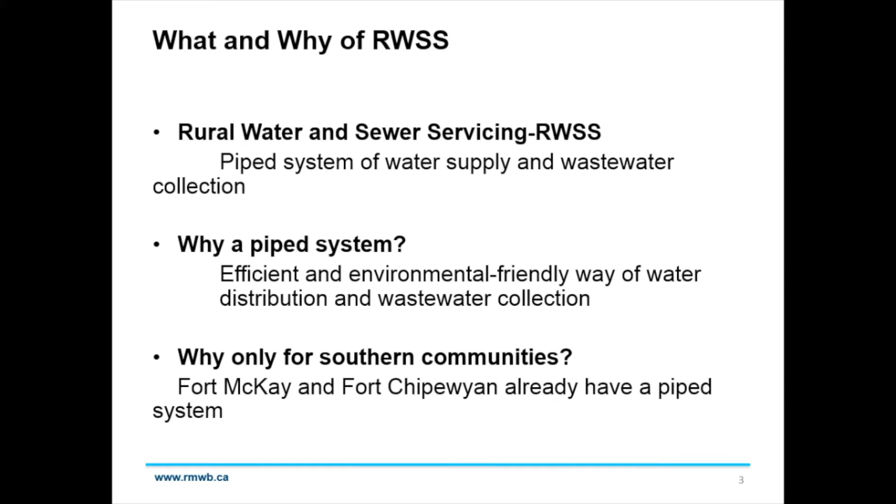Why only for southern communities? Because our northern communities, like Fort McKay and Fort Chipewyan, already have a pipe system.

The current water servicing to Saprae Creek looks like this, in which water comes in through the municipal pipe, where I'm moving my cursor right now, and it goes to your building.

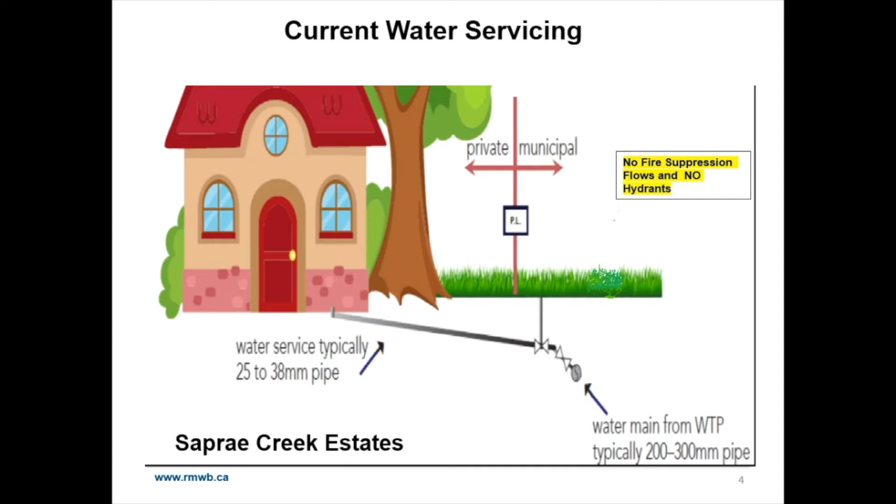The current sewer system looks like this. The wastewater from the building comes into a septic tank, goes into the pumping chamber, then goes to the mound or septic field. Some houses have a septic field.

There are a few houses which have a holding tank, where they need a wastewater truck to come every week, every second week, or twice a week, depending on use, to collect their sewage and dispose of it.

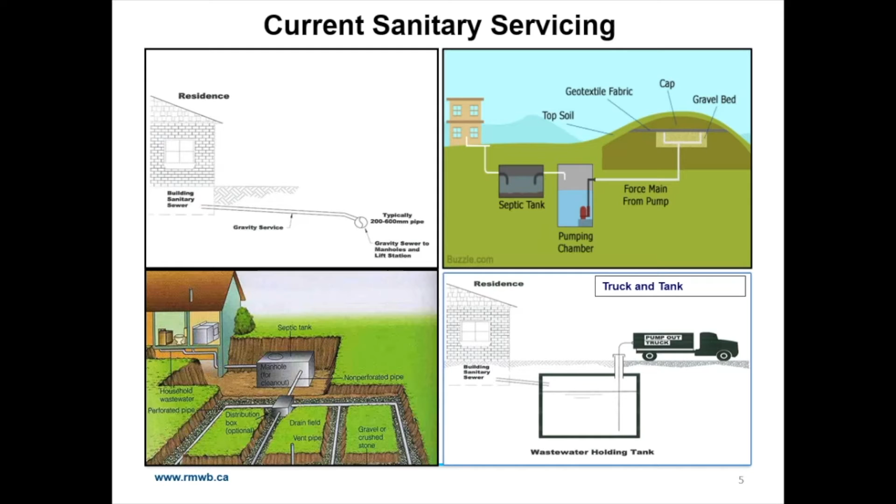Considering this existing system, the Council of the RMWB, in its meeting of July 9, 2014, approved a low pressure sanitary system and an upgraded full pressure water system for Saprae Creek.

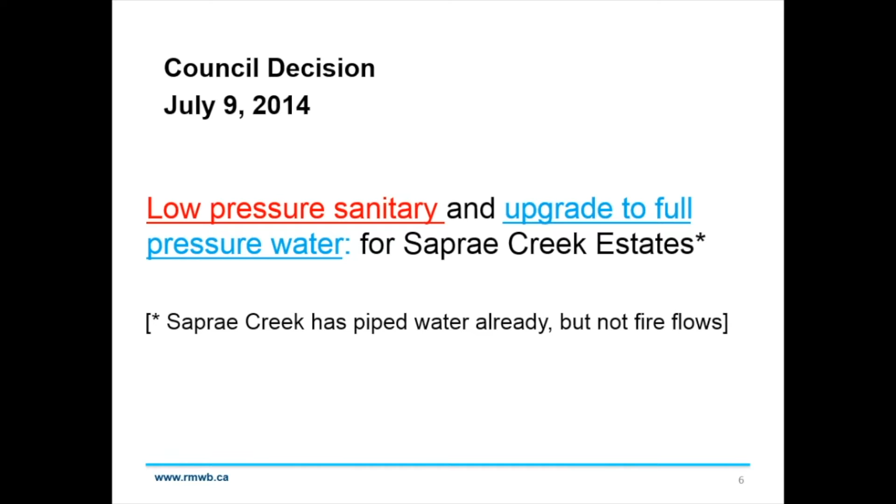The new system looks like this. This is the water system that we have just provided. If you can see, it has a hydrant, meaning the flow within the pipe system now caters for firefighting. There is enough flow to fight fires, and the hydrants are there.

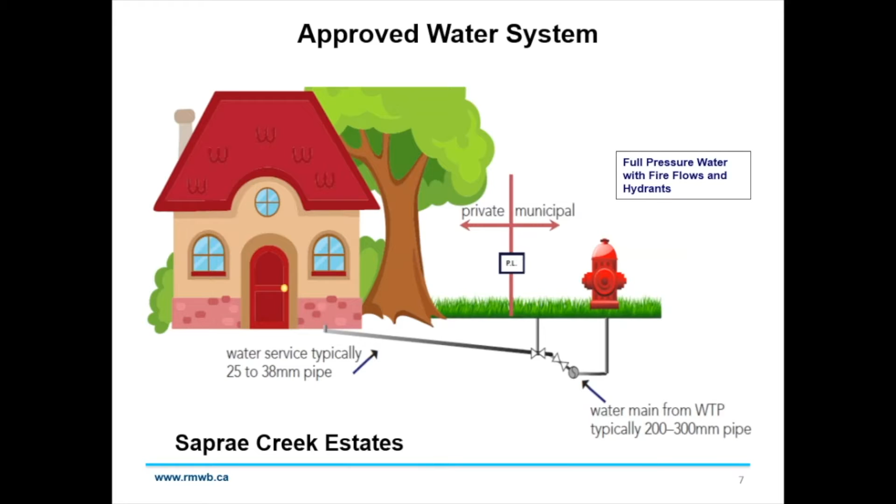The sanitary system looks like this, in which the septic tank will be connected to the municipal pipe. It will no longer be discharging onto your septic field or septic mound, and you won't need the sucker truck coming to your lot every week to suck the gray water.

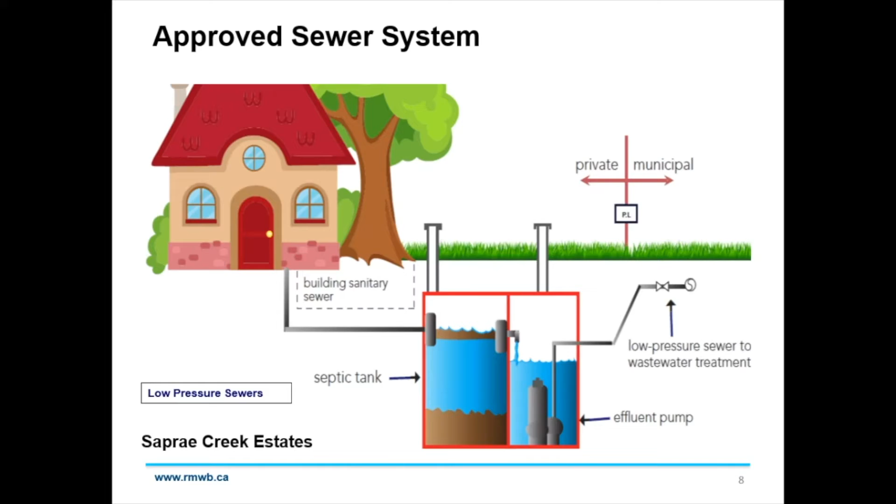The system required is efficient when the houses are below the road, where a normal system cannot work efficiently. In those cases, this system is the better choice to make sure the house is serviced.

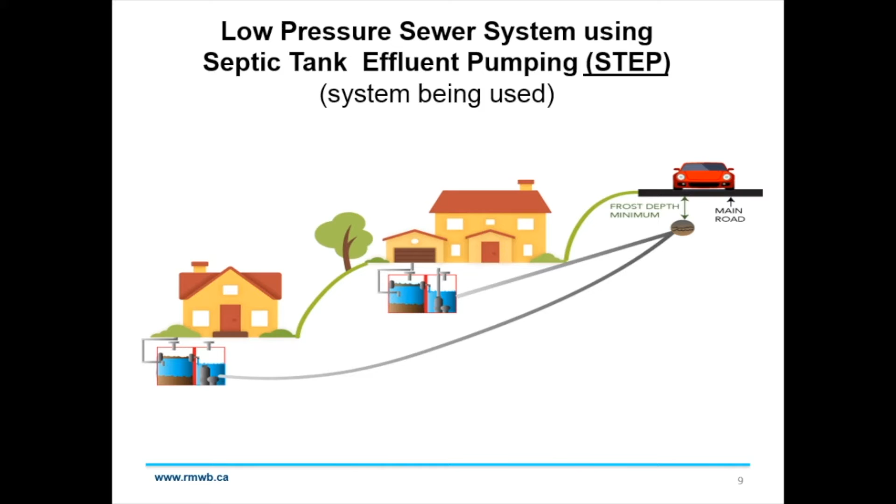Benefits of the pipe system: predominantly, it's a protection of underground water and the surrounding environment. The pipe system is affordable, dependable, and sustainable. It is used in other municipalities, for example Lac La Biche County as well as Strathcona are two examples from Alberta using this system, besides others in the United States.

This system will eliminate or reduce truck traffic on the road, which will enhance dust control and allow us more control over dust, enhancing the life of our roads. We believe this system will also increase the value of the property.

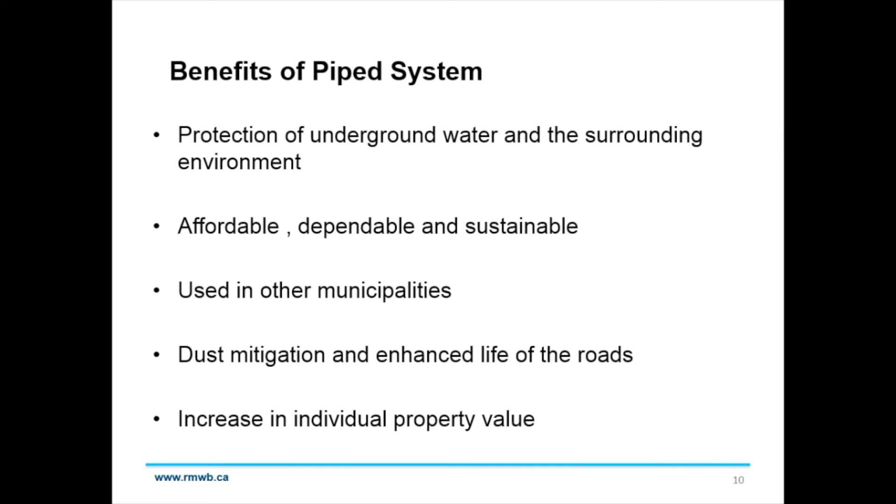In order to reach this stage, which is the service connection stage, we needed to do a few projects before we start asking homeowners to apply for service connection. We needed to construct the road, construct the water and sewer main line within the road, and construct the lift station.

I'm moving my cursor here. This is the lift station we have constructed, the fire hall. We also needed to construct a force main which conveys or transports the wastewater from Saprae Creek to the airport wastewater system, and that is connected to the wastewater system in Fort McMurray.

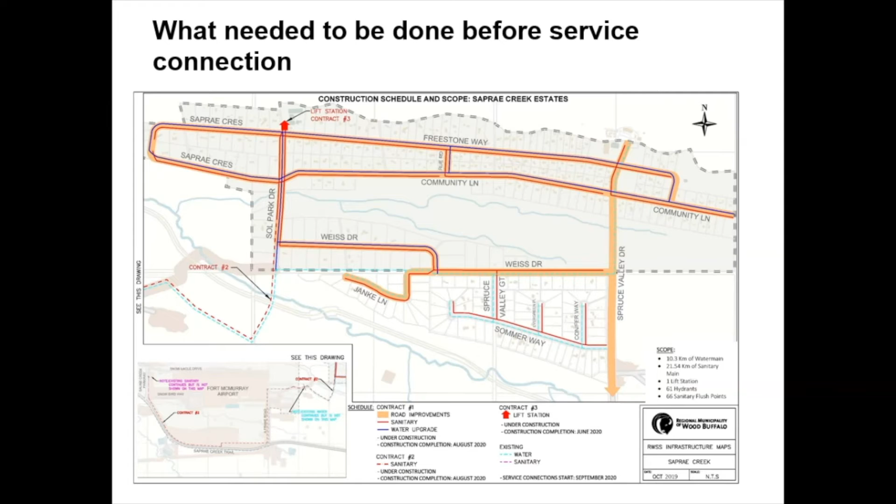So all this work needed to be done before the service connection stage. We have done this, and now we are at this stage, which is called service connection stage. All this took from 2015 to this day that we have reached this stage. We started design in 2015, and we are continuing with construction to date.

We have received feedback from the community during that time. We collected the feedback, went to council, updated council for direction. Following that, we embarked on lot assessment, which was to let the contractor go estimate the cost of connecting each house with the municipal water and sewer main on the private lots. We then went to council to get the service connection plan approved.

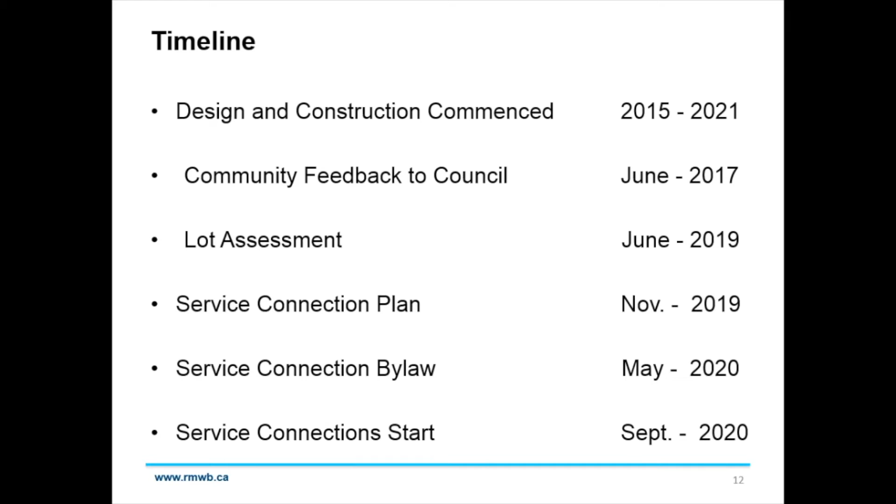After that, we did the service connection bylaw. That got approved in May 2020. And then we reached the stage called service connection start, or service connections stage. This gives me the opportunity to explain what service connection is.

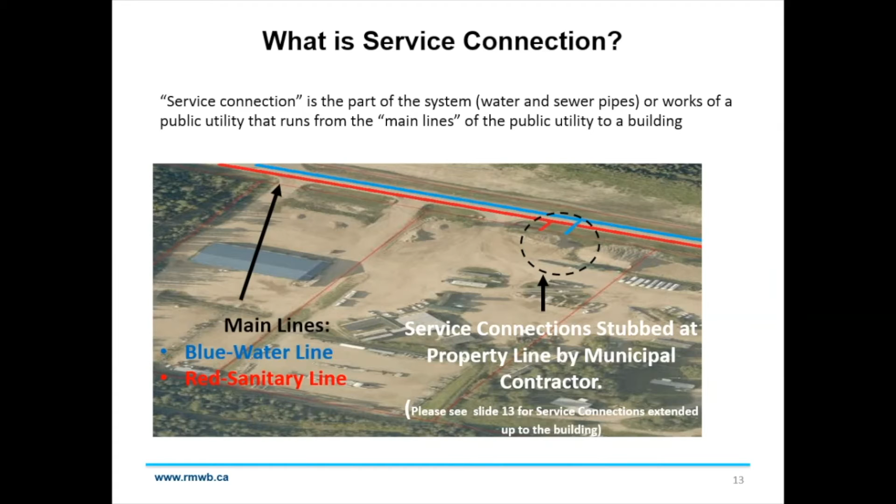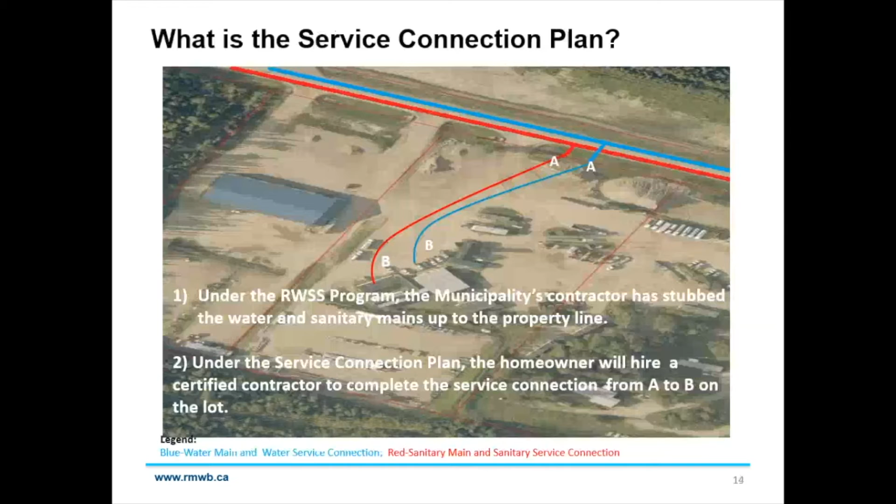Service connection is just the connection of your building to the municipal pipe laid in the road, shown in blue and red on this slide. It is the piece that starts from A to B. This is called service connection, or the work on the private lot, on your lot.

The approved plan from council, the service connection plan approved from council, included service connection design and required permits. As asked by somebody in the previous session about the permit fee, the contractor will include in his quoted price the permitting fee, as well as the permit preparation fee and permit submission fee that he will spend his time on. He will price that and include it in the quote.

The service connection plan also includes supply and installation of sewage tank, water cistern, and pump as required. It also includes restoration of private property after construction. For example, if the house or landscape area is disrupted, the contractor will include in the price the cost of restoring it. It will definitely not include upgrade of existing plumbing and electrical systems, which will be the homeowner's cost, and it will not be funded by the program approved by council.

In this program, lot owners will be responsible for installation of the service connection at their lot through a certified installer. So they will be in control of the contractor's timing, quality, and work. The total fee payable by the homeowner will be $10,000, payable bi-monthly over a 25-year period.

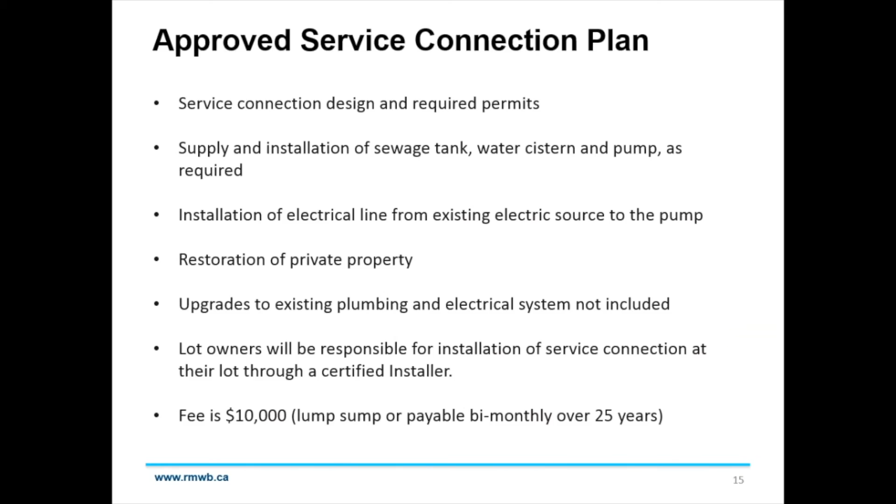In this service connection plan, the process is that the homeowner will get all the paperwork, documents, and application papers from the website, and they will apply to the municipality. One email address is provided for the quoted price from a contractor, and these documents will be received by the municipality.

The application committee will review it. If the quote is within the estimate, it is approved and the homeowner will be informed, and the contractor will start the permitting process, then construction will follow.

From this point onwards, all the existing process has to be followed, like any permitting process, the homeowner starts the work. When it's time to get inspection, the homeowner's contractor will inform the safety codes officer and then schedule an inspection. This is the same process that has been adopted in the past, and it will continue.

Once the system is running and the safety codes officer issues the completion report, which we call the permit service report, the contractor will be paid by the municipality. Once the entire work is complete, the remaining payment will be paid to the contractor.

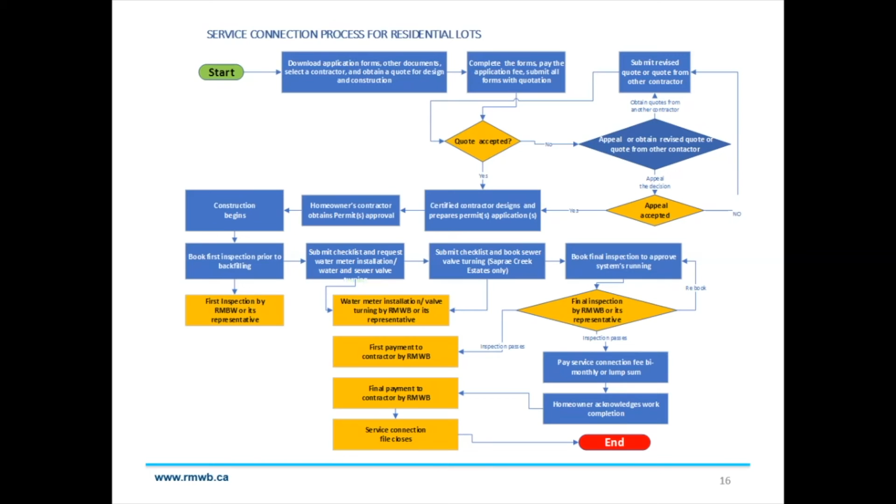This process chart is included in the homeowner guide provided to each house owner. In this guide, we have also clarified and explained the permitting process, which is also very important. Who will issue the permit, which branch in the municipality will issue the permit, and who will obtain the permit is listed for each community in the homeowner package.

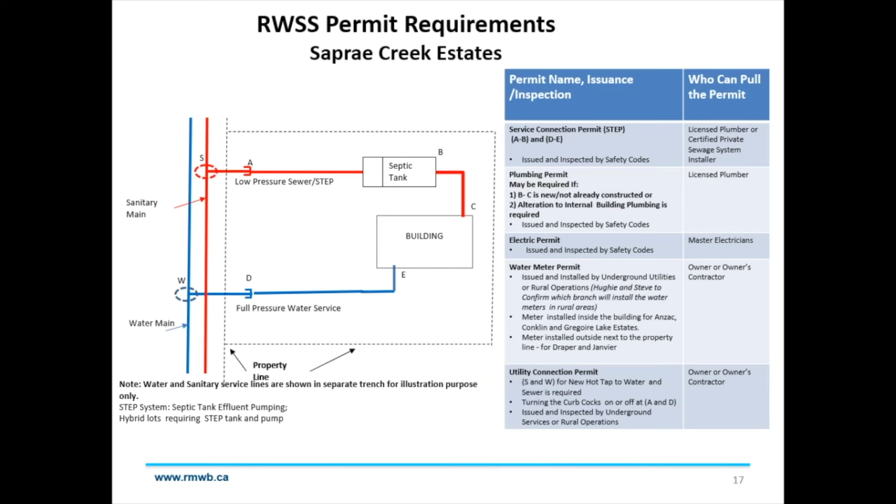With this homeowner package, we have also provided technical guidelines for the contractor. This is the minimum guideline that the contractor will need to follow to ensure quality work.

Your contractor is the designer, but he has to follow the minimum guideline established by the municipality and provided on our website.

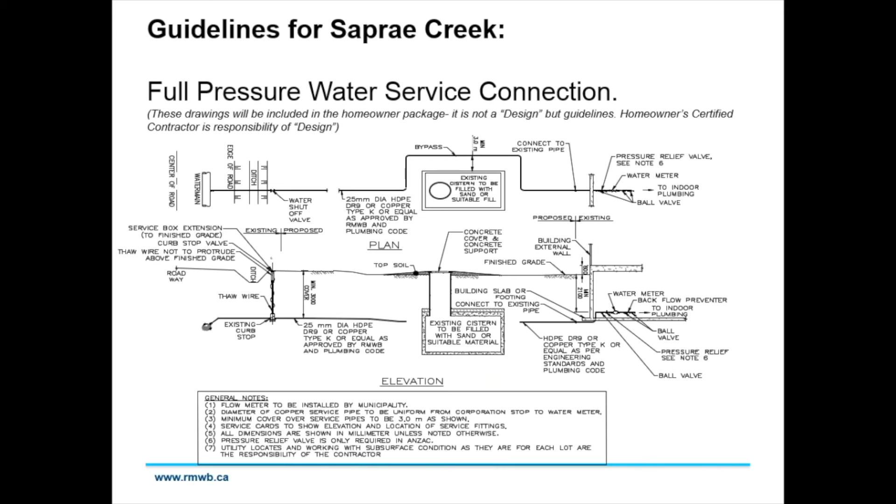If the information provided on our website is not enough, a homeowner can reach us through a specific question through Pulse.

We will keep updating homeowners through community newsletters and social media. Please note the website address; if somebody doesn't remember it, a simple web search with RWSS RMWB will take you to that website, which has all the information.

Again, if there are still questions, RMWB Pulse is the right channel to ask questions, and those questions will be sent to us, and one of the team members from RWSS will answer them.